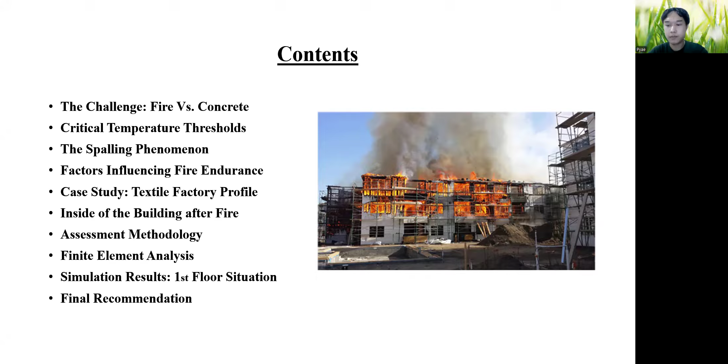So the first one, the challenge, fire versus concrete. As we already know, concrete is highly durable. However, when it is exposed to extreme temperature conditions, fire in this case, we need to study extensively in order to understand how these structural members, especially concrete, respond to extreme fire. So, concrete is generally recognized for its high capacity to resist fire.

However, in order to safeguard the building and the resistance of the building, of course, we need to extensively understand the microstructural alterations of the buildings. Another one, thermal dilations. Elevated temperatures cause restrained thermal dilations due to kinematic restraints. This modifies material behavior, leading to internal pressure buildup and potential structural failure.

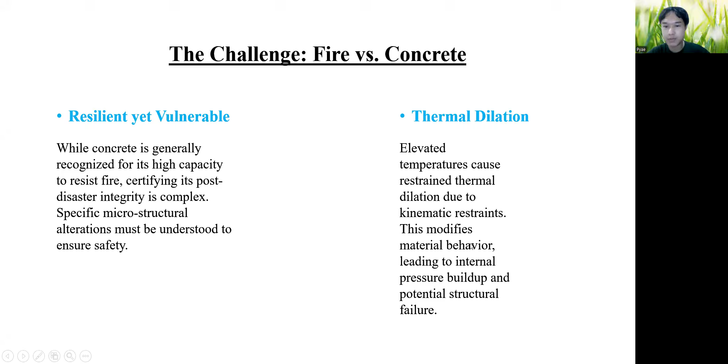Critical temperature thresholds. In this case, they will be divided into three categories. The first one is 100 degrees Celsius, the second one 300 degrees Celsius, and the third one 450 to 600 degrees Celsius. The first one, at 100 degrees Celsius, what happens? The initial heating happens. The pore water inside the structural members, concrete members, evaporates.

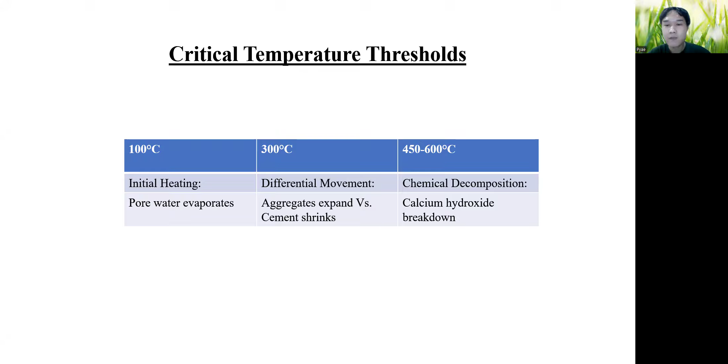Another one, at 300 degrees Celsius, differential movement happens. Aggregates expand and cement shrinks. So this is the difference. At 450 to 600 degrees Celsius, chemical decomposition happens. Calcium hydroxide breakdown happens.

So the spalling phenomenon. The spalling phenomenon is basically a cumulative effect of high internal pressures from vaporized water. As I have presented before, at 100 degrees Celsius onwards, the water inside the members evaporates. So the differential expansion leads to a critical failure mode known as spalling.

This violent breaking of the concrete surface layers effectively peels away the structural protective shield. So as the protective shield is removed, the internal materials are exposed to the air and the failure happens.

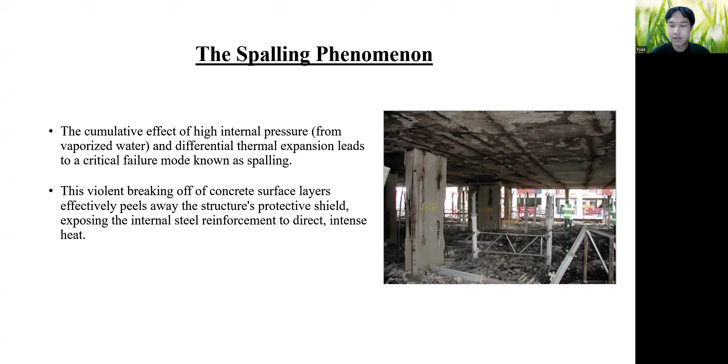So factors influencing fire endurance: applied load, strand characteristics, and concrete cover. Applied load, the actual weight the structure must support during the fire event, directly impacts survival time. Another one, strand characteristics. Steel loses strength rapidly as it heats up. So the strength-temperature relationship of prestressing strands is critical.

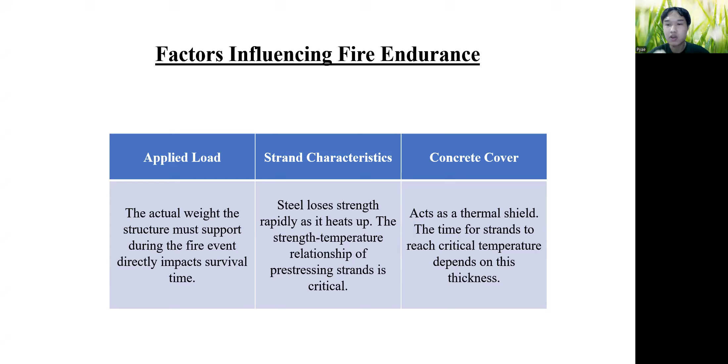And the third one, concrete cover. The concrete cover acts as a thermal barrier, a protective shield. So the time for the strands to reach critical temperature depends on its thickness.

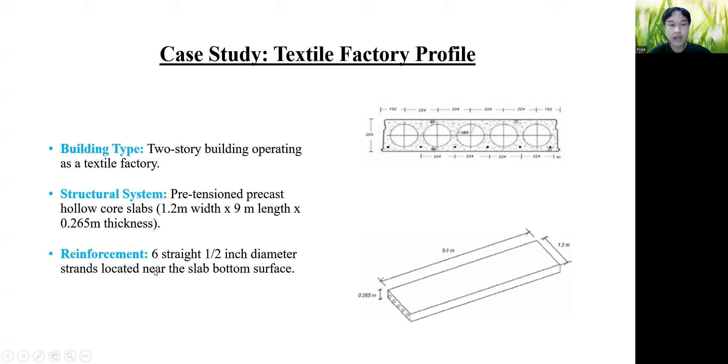Case study, based on the research paper that I used. Here on this slide, I have put the images of the building and the slab. The building type is a two-story building operating as a textile factory. Structural system is pretensioned precast hollow core slabs. Dimension is 1.2 by 9 by 0.265 meter. Reinforcement used is six strands, half-inch diameter, located near the bottom portion of the slab.

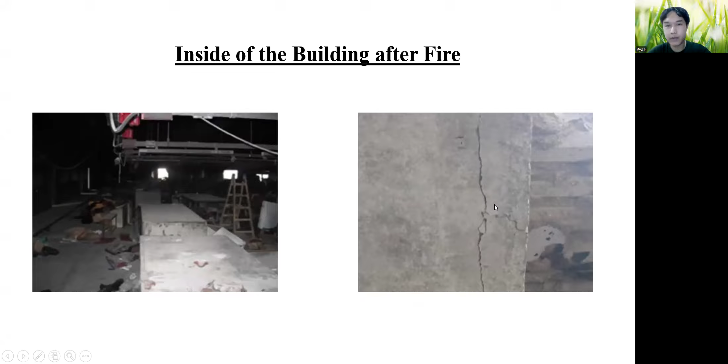So, the inside of the building after fire. As we see here on this surface, a lot of damage happens, and cracking of the concrete members also happens. Assessment methodology. So the first one is design reviews.

The authorities or the engineers, the professionals, review original drawings to establish baseline parameters and identify critical material characteristics. Following that, field investigations. They go to on-site visual inspections to match fire severity, and non-destructive testing. And lab analysis: after field investigation, they took some samples and then they sent the samples to the testing center for lab analysis.

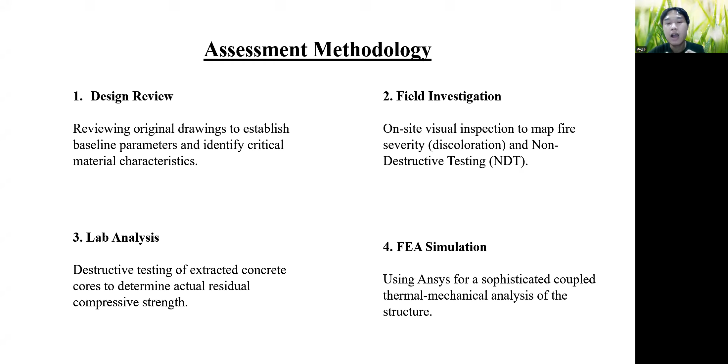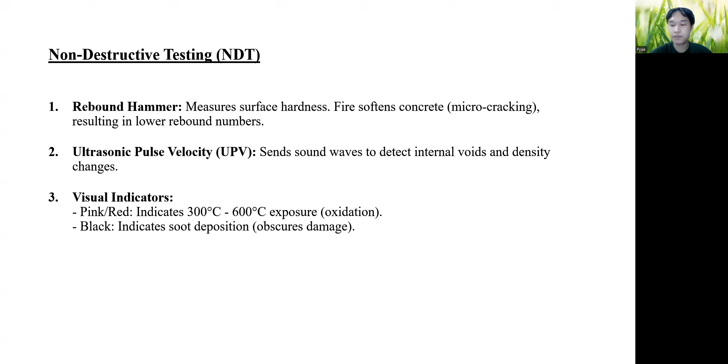And also, they do FEA simulation, which is finite element method simulation. Non-destructive testing. There are three used in this research paper. The first one, rebound hammer test, the second one is ultrasonic pulse velocity test, and the third one is visual indicators. Rebound hammer test. The main purpose of using the rebound hammer test is to measure the surface hardness of the concrete. Because fire softens the concrete surface, spalling and microcracking happen. So lower rebound numbers indicate reduced compressive strength.

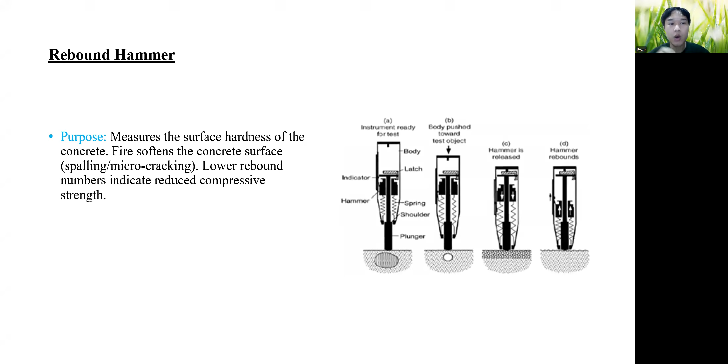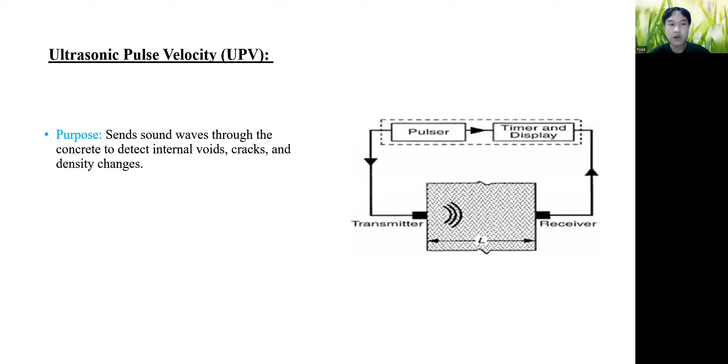Ultrasonic pulse velocity. The main purpose is to send sound waves throughout the concrete to detect if there are internal voids, cracks, or density changes. So the visual indicators. There are two floors in this building. The first floor is highly severe. The concrete surface is a bit pinkish in color, and some places give reddish colors. These pinkish and reddish colors typically mean that the concrete has been exposed to temperatures between 300 and 600 degrees Celsius, which is really hot.

As for the second floor, it is lower compared to the first floor. However, on this floor, in some places the surface was black, likely due to smoke deposition. So sometimes it's really hard to read the color indications because of this surface blackness.

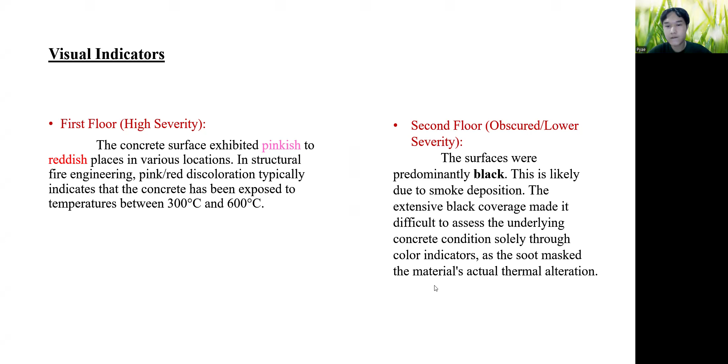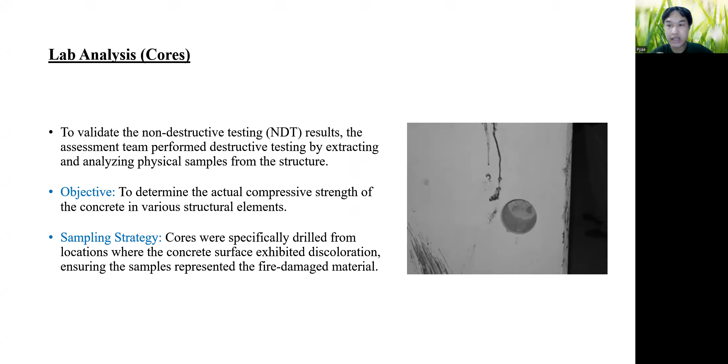Lab analysis: cores. In this case, I have presented the images of a core sample taken out of a structural member. The main purpose is to determine the accurate compressive strength of the concrete in various structural elements. The sampling strategy: cores were taken specifically at different locations where the concrete surface exhibited discoloration, ensuring that the samples represented the fire-damaged material.

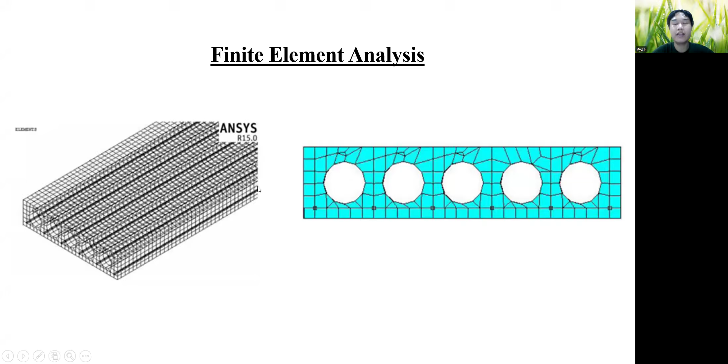So the finite element analysis. This is the representation of the member used in the building. They model the member in finite element analysis in ANSYS software, and then they analyze the building. So the simulation results. The first floor represented the most critical scenario due to direct surface heating. It means the fire is exposed from the top and the bottom as well. The thermal isotherms reveal a rapid temperature rise throughout the cross section, causing significant degradation in both the siliceous aggregate and the heat-sensitive prestressing strands.